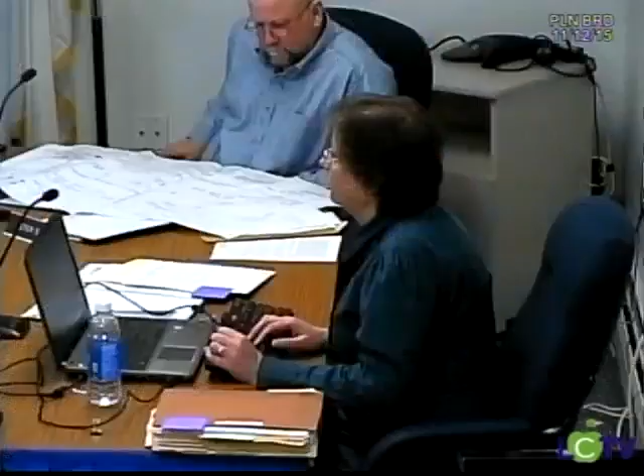I think the notes reflect that. Are we signing these? Just this and several copies of that. What does that do for frontage? It goes from 294 feet to 350-something feet, which then turns around and gives Mark T. and Cheryl C. Hollinger enough frontage to make another lot out of that. Is that what it does?

That's a possibility, but I think if you look at the location of the house, it's not gonna be able to be done because that house is pretty much centered. They just want the additional land. I suspect it might be for septic expansion in the future. They've got 3.5 acres as it is now. Why do they need another almost an acre, two-thirds of an acre?

Well, who cares? Does it meet the standards of an ANR? Yeah, so we're done. Not allowed to ask questions? Well, I mean, sure, if it's germane to the standard of an ANR, but who cares why they want to add land to their land?

Gentlemen, is there anything on this document you see that anyone needs to comment on? If not, hearing none... The only problem is it has the wrong abutters around it. Does it matter? The abutters are wrong. Does it matter? It doesn't matter for the purpose of the plan.

Okay, and it's now formally on that. The only thing that matters is their names being right. They check those to the deeds currently. I'm an abutter, but I'm not on it. Well, Mark, you're not memorialized on this one. I guess not. Does it matter to me? It's fine with me. Does it break your heart? Nope, it's fine with me.

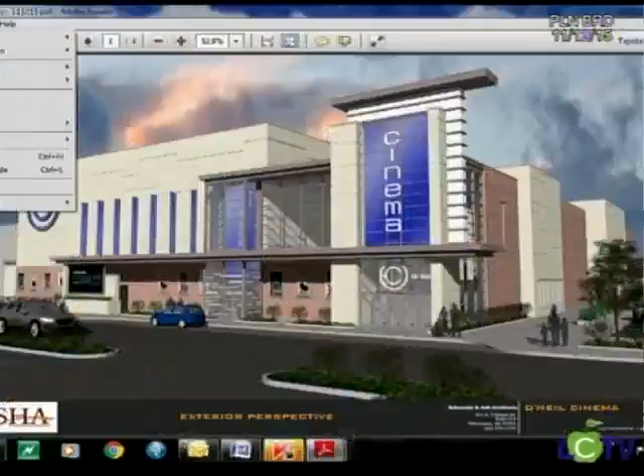As Sam said, last time we talked about the site plan and approved the modification, and here we're just revisiting to show the final elevations. I think David's team did a great job taking into account comments from the board, bringing things to a more pedestrian scale and incorporating site features we already have in the architecture on site. So with the image up on the board, I may let David take over. Gotta get our technical details going here.

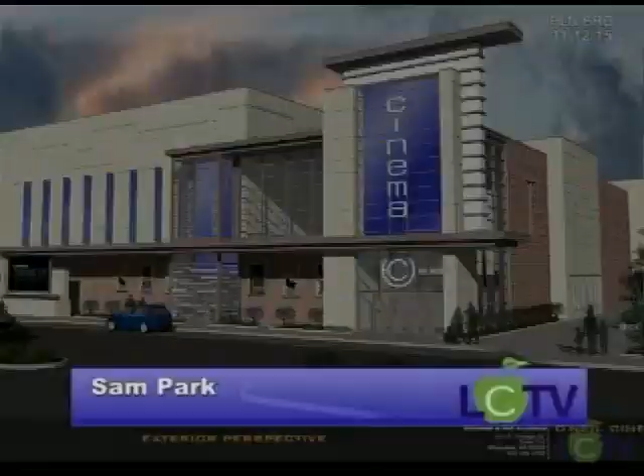So you can see on the cinema image, there's a lot more - he's added a canopy there, and a lot more lower planting along the edge of the cinema. Let's go with this. And there we go. So, David Baum with Schrader and Holt Architects.

Welcome back. Thank you. Three weeks ago you gave us great feedback. We took that back, went back to the original renderings that were presented to the town, and brought some of this identity into our building, tweaking it based on the comments you had.

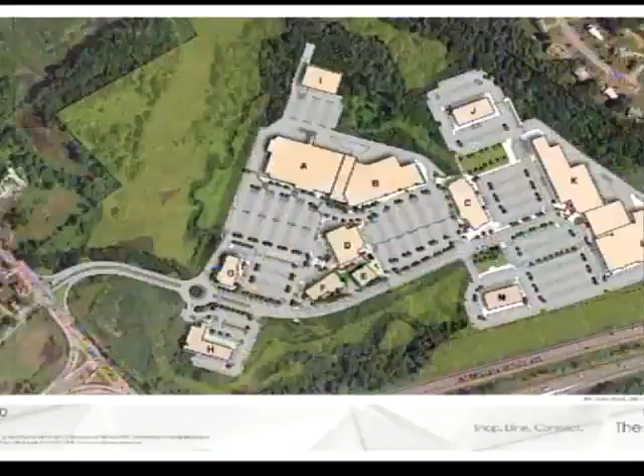So the first thing we talked about last time was pedestrian access from the restaurant - Tavern in the Square, Building C on the plan. You wanted a pedestrian walkway up the main boulevard, with nice planting along there. Our development team has pulled all that together for you. You go across that drive lane to Building K, and then we are Building L.

And what you asked for is a more pedestrian-friendly building with more Littleton character to it. So if you could go to the other image, the rendering - yes, that one there. What you see here is a revision we've made based on your comments. If you recall last time, that entrance piece was turned at a 45-degree angle because our client wanted it to face the interstate.

You guys wanted to face the center more and be the end terminus of that walkway. So we've made that transition, turned the building, squared it towards the parking lot so that you have a better view from Constitution Boulevard, okay?

The other issue is we wanted that more pedestrian friendly, more Littleton feel to it. So as you can see in some of the existing original buildings, there are these long canopies that came across the storefronts of various buildings throughout the center. So we brought those canopies into ours and stretched that canopy across the whole building, from 3/4 across the Grand DX screen all the way out past our entrance, to bring the scale of our building down.

We've got a lot of ins and out articulation across that building, starting from the left with a sign panel, which would be our reader board that would promote what movies are playing at what time. So as you drive through the center, you can see that this movie is playing at this time tonight.

And you can go to the restaurant, park down there, take your walk up, and be sure you're back here at that time. The next element in is another storefront that we have, and that's for our little lounge area that we have inside. So you can come in, sit in there, wait for your kids to have the movie, and then you don't have to go to the movie if you don't want. You can sit in the lounge and watch the sports games that are going on the big screen TV.

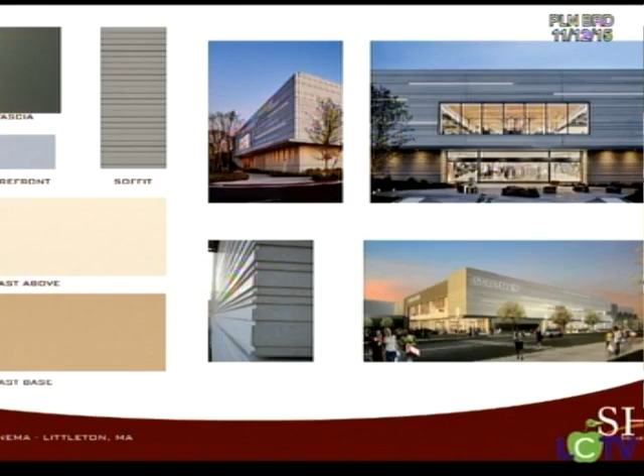Very nice, it does help with the massing, bringing it down. Subtle glow. Will you have the same down lighting that they're showing in the awning, or less? We're not gonna have that scallop effect, but yes, we will have downlighting. You'll have it over the posters probably? Well, you don't wanna light the posters because the posters are illuminated and they glow, so I can't put light on them. But we do have light in the ceiling that'll light up the sidewalk, but not the wall of the building. So the posters will glow, thank you for doing that.

And are those the materials, the precast? Yes, so it'll all be precast as opposed to metal panel, correct. Very nice. Those lights, just a final question for me, can they be adjusted if they're too bright, can you tone them down? Yeah, we can put them on a dimmer system. You can do that? Yeah, it's an LED light, so you can just dim them up and dim them down.

We're really focused on the lighting, especially in the evenings, so when you look at this, this is the ones we powered up for the second set of buildings. Isn't that nice? It just creates... the light actually takes away the blandness at night and kind of breaks it up a little bit. So it's sort of a scale issue. Yeah, I think it's a good idea, like, I mean, you see these buildings lit.

We aren't going to do the WBUR sign on the Mass Pike, you know. But when you get all the little features lit up, the one I like the best is when you look at the way they juxtapose, looking down the alleyway. Is that from the Starbucks? This is actually, believe it or not, the pet source, looking down at the Anchor. Really nice, I'll have to go up there. It actually lit up nice today, and we'll be running through the rest of it shortly.

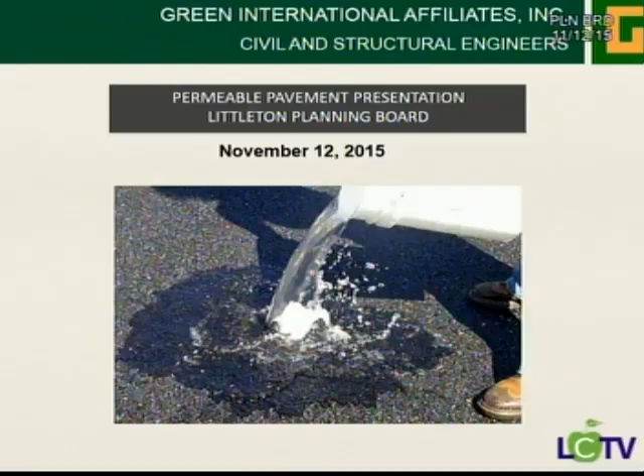All right, good evening, thank you, Dan. I want to first clarify that I'm not here as a sales pitch for permeable pavement. We were asked to come in and give our expertise as we've used these systems and seen how they've been designed, constructed, and maintained, and some of the benefits and problems with them. Please feel free, as I'm going through this, to ask any questions. You don't need to wait until the end, and if I'm getting too technical, just let me know.

So I want to talk first about what is permeable, also called porous pavement—you'll hear me use those interchangeably. What type of permeable pavement systems are there? There's actually more than one. Where is it appropriate to use, and where is it not appropriate? What are some of the regulatory requirements when using these? I'll give you an example where Green designed a system that's been installed for several years. What are the maintenance requirements? And then I'll sum it up with a summary of some of the benefits and cons, and open it up to questions.

So this is a typical example of what a permeable pavement system is. Before I get into this, any new project coming for permit approval, whether new development or redevelopment, if they're increasing impervious area, they need to deal with stormwater and mitigate it. Permeable pavement came about because when developing an area, a lot of land could be used up for stormwater BMPs like detention basins. So when you have valuable land area you don't necessarily want to use for that, permeable pavement provides a hardscape access for both vehicular and pedestrian uses, while also being designed as a stormwater best management practice that treats stormwater runoff.

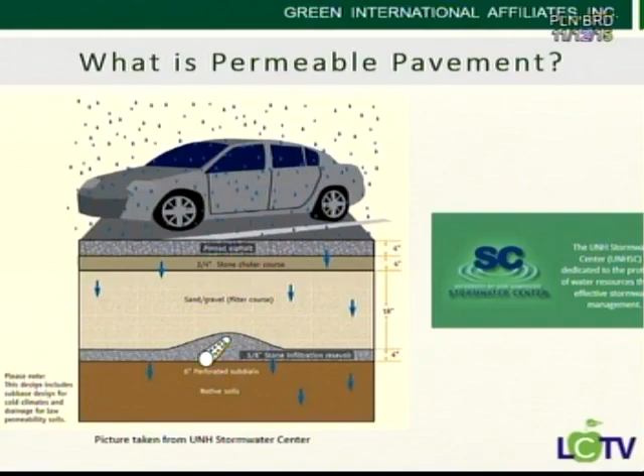The way porous asphalt basically works is it's an aggregate and asphalt mix that basically takes the fine sands out of the mix. So it creates these void systems, so that the water can just drain vertically through the system and infiltrate back into the ground. That's really the intent of these systems.

The third one is permeable pavers, and we see the pavers themselves are not permeable, but it's the void space between them that allows the water to infiltrate. If you see the acronym PICP, that stands for permeable interlocking concrete pavers, same thing. The fourth one is an open graded grid system, where the grid can be made out of either plastic or concrete, and you can fill it with gravel or turf systems.

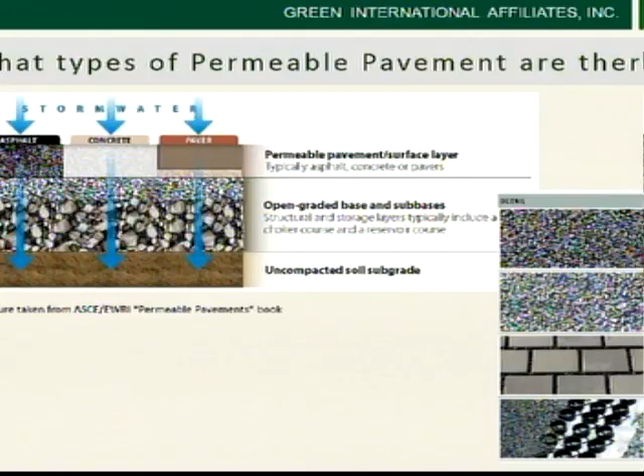So these are the standard permeable pavement systems that can be used for design. One of the most important things when looking at where these systems can be used is looking at your site conditions. These are not systems that can be used everywhere. They absolutely have places where they're inappropriate to be used.

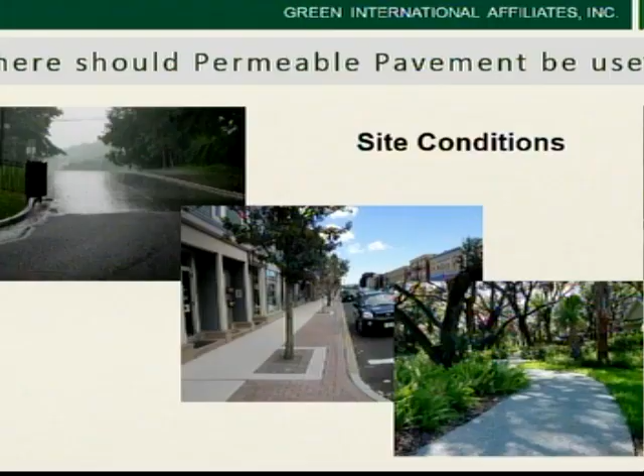Some of the main things that need to be looked at are: what are your soils beneath here? Where is groundwater? And what are your site constraints?

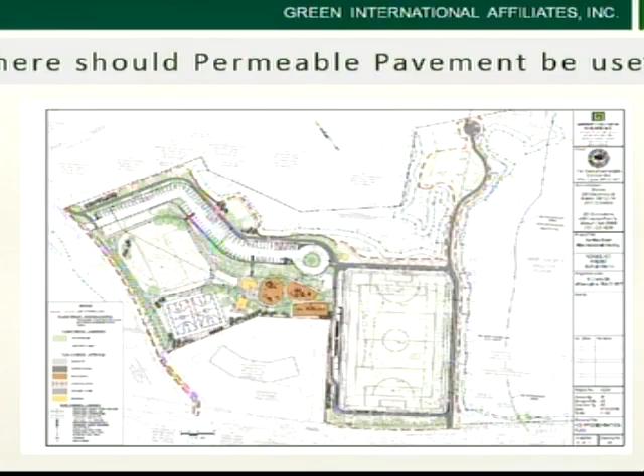This is an example of a project we're working on in Wilmington where we had some site constraints where the town wanted a perimeter sidewalk going around the entire area. You can see that dark gray is this sidewalk, and it also goes all the way up to the north. Where that portion goes up to the north, we had some resource areas on the side, so we really couldn't install a traditional sidewalk there and have either it sheet flow into a swale and capture and collect it, or do curb and gutter because of the grading and everything. So this was a way we were able to give the town a hardscape sidewalk, but also meet the stormwater requirements because this is a new development system.

So when we're looking at some of the site constraints and conditions and whether it's appropriate, some of the things that want to be looked at is: is there ledge on site? These things are meant to infiltrate water into the ground. If there's ledge there, that's not going to allow it to infiltrate into the ground. So it's definitely not advised where you may have ledge.

What is the distance for the seasonal high groundwater? There should be at least a minimum of 2-foot separation between seasonal high groundwater and the bottom of these systems. Not the top, but the bottom of these systems.

Is there a Zone 1 interim wellhead protection area or Zone A surface water protection area? If there is, they should not be located within them. They should be outside of that.

If it's within that, it needs to be lined and not infiltrating. Does the area have a big grade change in topography? Typically, when we look at designing these things, we want about 5% or less grade for when designing them. And then, is this system going to be placed next to a building?

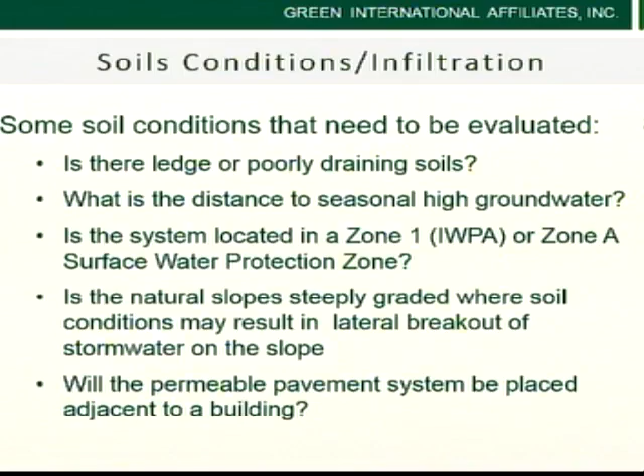It's not to say that it can't be placed next to a building, but if it's less than 10 feet from a building, there should be appropriate controls designed so that the building is waterproofed. Maybe the system is lined with an impermeable liner right next to the building. We want to make sure that when they're being designed, the water that infiltrates does not get into a basement or cause flooding.

When someone's looking at different sites, there are multiple ways to design these permeable pavement systems. The first is more of a full infiltration system, shown on the top left, where you have no underdrain system—the water infiltrates vertically straight through it, and that's it. That system would probably only be recommended for A-type soils, where you have really well-draining soils.

Typically we use more of the second and third type of section when designing it. Mainly, it works as a partial infiltration system in that it goes vertically through the system, but you have an underdrain system there. That underdrain could be designed for a couple different reasons—one being if you have poorly draining soils, it allows some of the smaller rainstorms to infiltrate, but any larger storms get collected and moved out, with some other stormwater treatment mechanism to handle them.

Or the third type is designed as kind of an overflow system, so you're allowing it to infiltrate even more, but it has to fill up first, giving it a redundancy system so that in a stormwater event you didn't anticipate, it gets into the system and out again without causing any harm within the pavement system.

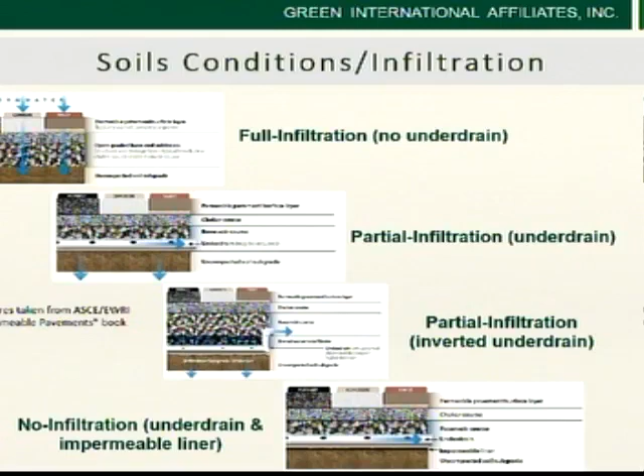So how would an engineer go about showing that treatment in this system would be equivalent to a traditional system? They would need to submit a stormwater management report showing how they're meeting the water quality standards and the peak rate—the drainage layer, that bottom layer, is basically acting as your basin, so to speak.

And the only credit that you can use is basically the void space of that, so you can only use about 30% void space to take credit for the amount of volume that you actually have in these systems. So they need to show, typically, how they're meeting the 2, 10, 25, 100 year storm, whatever that is.

They need to show that they're meeting their peak rates using this type of system based on their native soils below. Are they using an under drain? They'll have to put that in their design and show that in all the calculations. Then they'll have to show how they're meeting the recharge calculations and water quality.

This system can, if it's designed properly, with the proper soils and proper separation of groundwater, meet all those requirements. But there are several steps that need to be evaluated first to even determine if it's appropriate to use this.

And going back to the glacial till question, that ties into what she said, that sometimes those soils, such as glacial till or clay, may not be appropriate to use this type of system unless you design the proper overflow systems to account for the fact that you're not going to get that infiltration. You still get treatment through the media, but not the infiltration you'd get with sand.

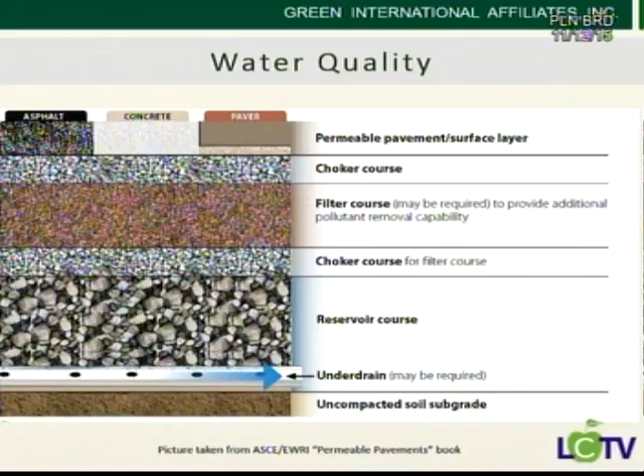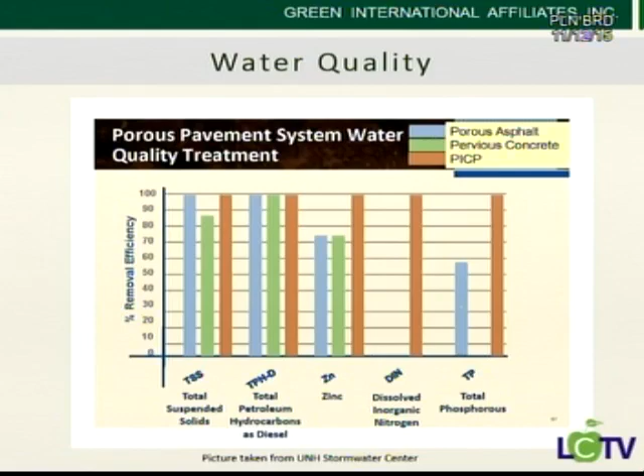Pervious concrete wasn't analyzed. It's showing between 50 to 60% phosphorus removal for the porous asphalt, and the permeable pavers have almost 100%. The other thing this is showing is total petroleum hydrocarbons, which you get from oil drips - all 3 of these systems treat about 100% of that. The reason for that is the sand filter. If you don't have that, you're not going to get those results, but that sand filter acts as a great treatment for those type of systems.

One of the other important things when looking at these systems is the regulatory requirements. Anywhere within the jurisdiction of the Wetlands Protection Act, you're triggered to the Mass DEP stormwater standards. My understanding is the Littleton bylaw, if you're coming for site plan approval, also triggers compliance with the Mass stormwater standards and subdivision regs. Bottom line: there are specific requirements - they should be located outside of Zone 1, the interim wellhead protection area, and outside of Zone A, the surface water protection area. They need 2 feet of separation to groundwater, and there are other setbacks and slope considerations that need to be looked at. So there are important regulatory requirements that need to be addressed.

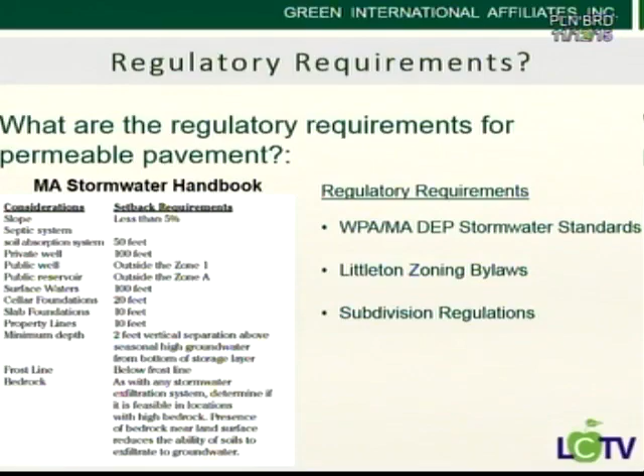They should not be used in areas with high traffic or high average daily trips. If you have a site like a big retail site with a lot of average daily trips, this would not be recommended. It's also not recommended for land uses with higher potential pollutant loads - you want to be careful of that. It doesn't mean it necessarily can't be used there, but if used in those areas, they need to be lined. They cannot be infiltrating systems - they need to be lined and would need some other supplemental BMP.

When I just finished the Bancroft School in Andover, they had a fire road made out of permeable asphalt paving, used in place of a stormwater retention pond. So the kids ended up with a playground instead of a retention pond, and the 2 feet of special material underneath the fire road became the retention pond. It's a fire road so nobody's really on it - but they still vacuum it, sand still gets in it, and they have to vacuum it out.

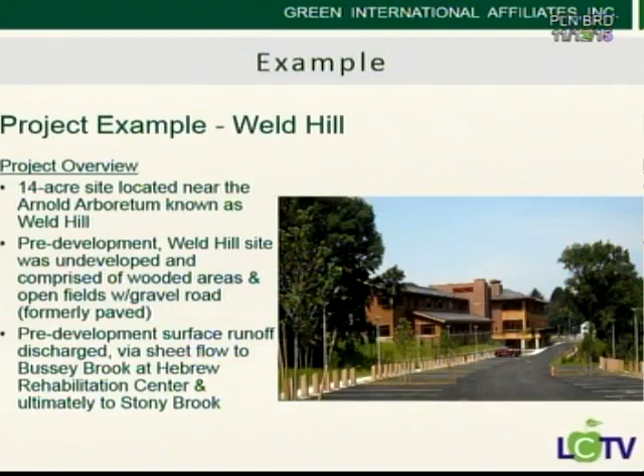This is an example of a system that Green designed at Weld Hill, owned by Harvard next to the Arnold Arboretum. It was a driveway with about 50 parking spaces designed as porous pavement, installed in 2009, and it's been working remarkably well. The cross-section for what was installed is shown right there, and this site actually did have poorly drained soils.

So to overcompensate, they increased the drainage layer significantly. It wasn't just meeting the normal standards, they also put in redundancy measures. At the bottom of the driveway, they put in catch basins to overflow to a subsurface chamber system, because it was important there due to the poorly draining soils.

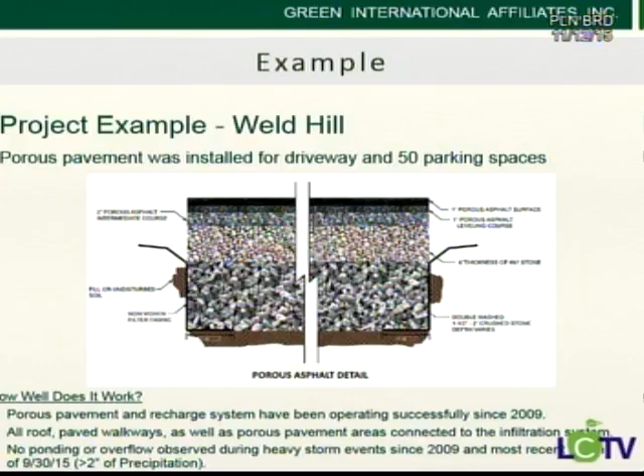But that's been in there since 2009. It's been through some major storms, and they haven't had any issues with ponding or frost heaving or anything coming up with that.

For a development like that, typically if you're bonding a development, you want to make sure our highway department doesn't get stuck having to come in 15 years later to mitigate some type of failure. Especially with that much complexity to a subgrade system, is there any recommendation for how, if we wanted to implement something like that on a road we'd take on as a municipality, would we want to be proactive about what type of funds need to be put out for mitigation?

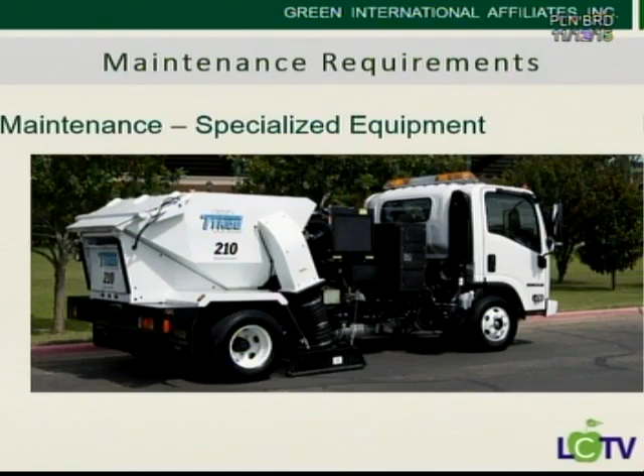There's definitely maintenance required, and specialized equipment that needs to be used. There's a regenerative air vacuum sweeper, which is less expensive and used more often, or you can go to fully straight vacuum sweepers that are more costly but can actually rejuvenate the porous pavement if it gets to the point of failure mode. So there are mechanisms that can be done if the system gets clogged.

Obviously the intent is to make sure it doesn't. One of the biggest things the town would want to ensure, if projects come forward recommending these systems, is that they include an operation and maintenance plan showing what equipment they're speccing, and how often they'll be doing sweeping and inspections. Because unfortunately, an owner gets excited, puts it in, doesn't maintain it, and five years later asks what to do — by that point it could be in failure mode. So it's really important that any project include an operation and maintenance plan, because if they're not going to maintain them, they'll fail early and fail often.

For a roadway that the town would eventually need to accept, you'd want to think very hard on that, because the maintenance requirement burden gets placed onto the town. Also with roadways, you need to look at the whole length of the road and the soils beneath it. It's also not appropriate for high-speed roads — you really want it for lower-speed roads. High-speed roads will wear it more quickly, so you'll be maintaining it much sooner than normal asphalt. So there are certain areas where you wouldn't want to use it for roadways.

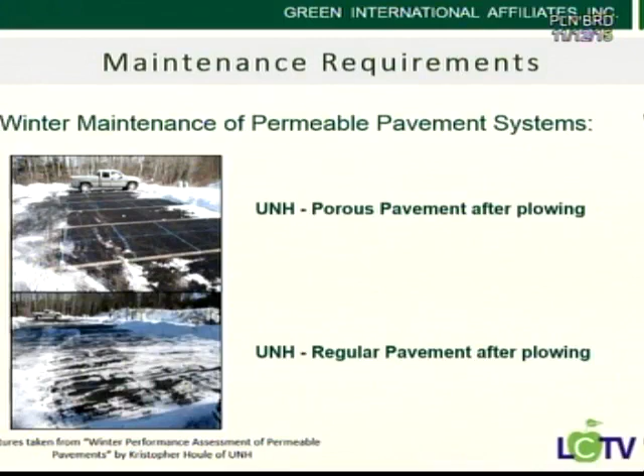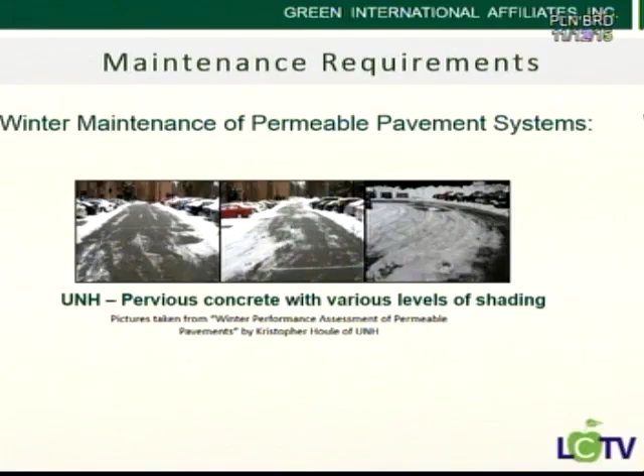I was at a seminar at UNH for permeable paving, and they took us out to an asphalt parking lot. They dumped a 5-gallon bucket of water on the pavement in the middle of winter, way below freezing, and it went right through. Yeah, 5 gallons just disappeared.

The great thing about it is because you have such a thick cross-section of this system, you don't get freeze-thaw. The whole purpose of regular asphalt is to keep water away from the drainage system underneath it, because if water gets under it, it freezes and causes frost heaves. With this system, because of the thick cross-section, the water gets down and never freezes up enough to affect the system. So you don't actually have freeze-thaw effects with that.

So this is just a quick summary of some of the benefits and cons. This can be used as a stormwater best management practice to treat runoff volume and peak discharge rates. It can be used to infiltrate and meet recharge requirements as well as water quality goals, as long as it's designed appropriately and site-specific. Another benefit is it can reduce stormwater temperature and the heat island effect.

A lot of times in the summer, with a regular asphalt system, the water that hits it and runs off along the pavement heats up pretty quickly. If it ends up going to a catch basin and then directly out to wetlands, you can have ecological issues with that. Whereas with this system, because it's going straight from the air into the ground, you're not getting that change in temperature, and you're keeping it localized and going straight in.

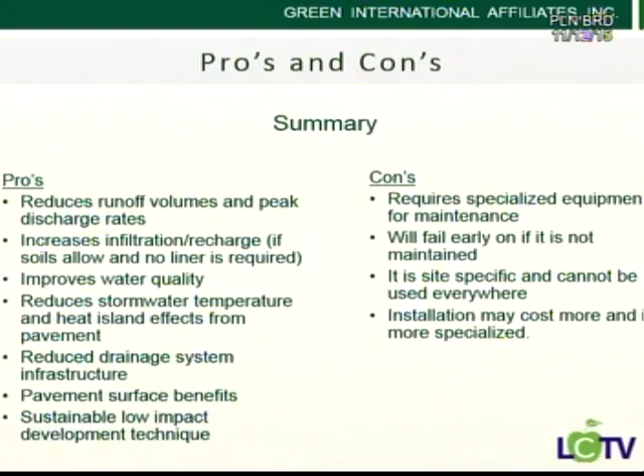Some of the cons are that it requires specialized equipment for maintenance. It will fail early if it's not maintained. It's site-specific, it cannot be used everywhere. And the installation may cost more in the beginning. It's more specialized, so you need a contractor who knows how to install it.

Wow, that's it. Great, good job. Any questions? No, that's great.

Yeah, one point they made at the UNH conference was that you want to capture rainwater as soon as it falls, because that's when it's cleanest. If you can capture it and get it into the ground soon, you address the total suspended solids, which is where all the contaminants are. So we have the rainwater captured, it brings it down, and that's where we need to treat it. So when it hits the system, it goes right in, and that's that.

Great, good. If the board has any other questions, feel free to contact Danielle and myself, and we can get you answers. Oh, you did a wonderful job. Well, thank you both. Okay, thank you. Thank you, Eric.

Okay. That's good. Oh yeah. So that's the seminar for this week. That was a good one. Let's see, it's 9 o'clock now, running a little late.

Turkey Tree Farm, 260 Foster Street, Grimes Lane, a 36 lot open space subdivision. The engineer has indicated they have significant new information to present at this meeting, and anticipate continuing the discussion at the December 10th meeting, given they had not yet authorized the peer review. But I think that actually happened - I did get the check for the peer review. Depending on how much new information comes in, Luke's going to take a look and see if he can do that within the original scope, or revise the estimate if needed. That's fabulous.

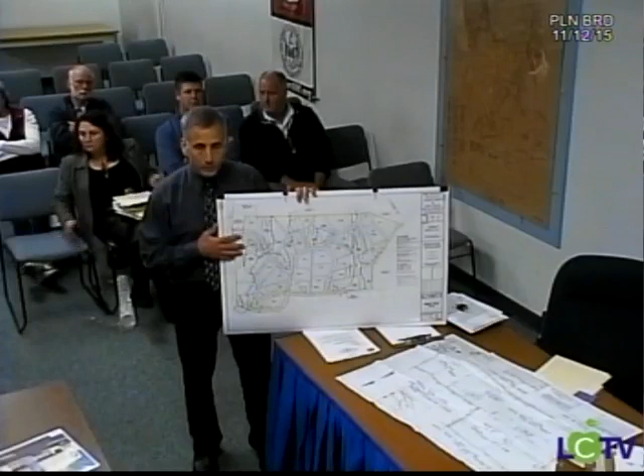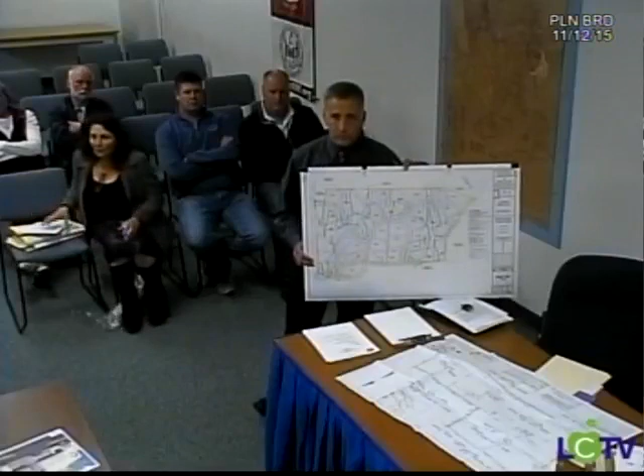We have reduced the subdivision from 36 lots to 31 lots. We listened to you and some of the concerns about the attractiveness of the open space along Route 2. That, coupled with discussions the applicant is having with the Board of Selectmen on the K piece - they have the K piece under agreement, and the selectmen are considering right of first refusal on that.

So there's been some discussions, and within those there was a great desire to preserve the western flank of the K piece, which provides a connection to the town forest. So within that discussion, our open space is now focused more to the west. What we've done is removed a portion of the southern Grimes lots from the mix, reducing us down to a 31 lot yield. This is the configuration of that 31 lot yield.

Within this, the board had concerns about nine of the lots as far as their buildability, constructability, whether or not they were truly lots. So the lots I've highlighted in green here, the 9 lots, are the ones we call marginal. What we've done within the package the board will receive is actually done soil testing and septic designs on each of those lots.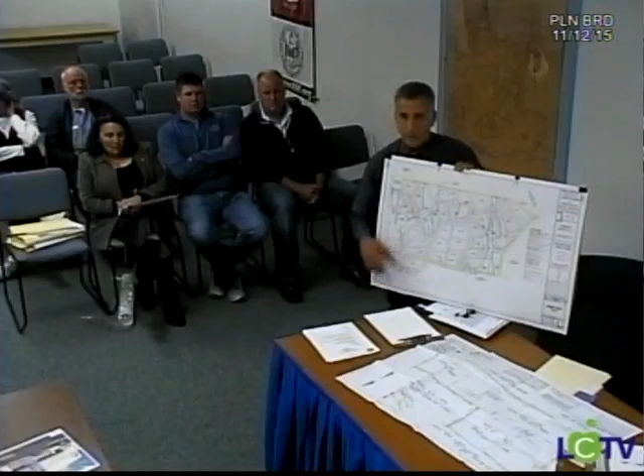Each of the 9 marginal lots - so you could see that in the worst case scenario, where the lots are tightest to the wetlands, we're showing that we can actually get a house and a fully designed septic system on those. We've done testing on those lots, and that's all reported for your peer reviewers to take a look at and verify. Our thinking is if the 9 most marginal lots are buildable, then we can prove out the yield.

So then we looked at the OSRD, and again, K's up here.

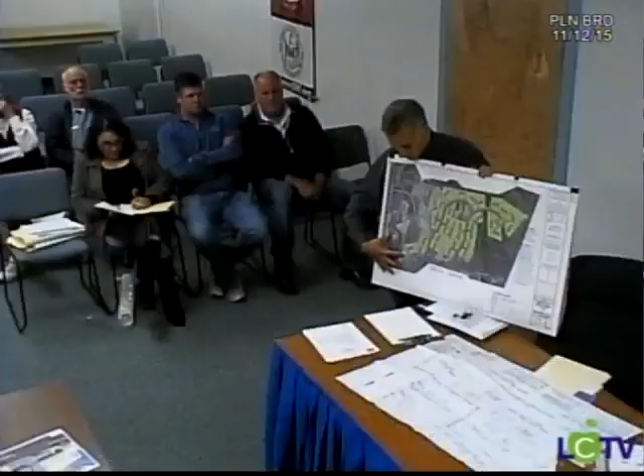Desire of the selectmen to preserve the western flank, provide that corridor between the train station and the town forest. So we're thinking of really concentrating our open space here. We've got a large piece in the island that's all dry, a very large piece of the active tree farm that's dry, and some dry land up in here.

I think we're up at 20... 21.4 acres of open space with 30 lots clustered here.

We've also rearranged this to have complete corridor spines in 3 locations: a northwest direction, a north-south direction, and then a spine going east-west for that critter crossing as the board wanted. So we provide a real nice buffer to the forest as far as the impacts there, keeping the development off Grimes, pushed up into the site.

We think we've got a plan that starts to address the concerns and comments of the board, and we think it's definitely ripe for the peer reviewer to get into it and get their thoughts back to the board, allowing you time to digest what we've just given you and move on from there. So you can grant whatever extensions to the 45 days that are needed for the board to move through this, and hopefully get to a point where the board's comfortable, and we'll move on to the next steps, the special permits and definitive subdivisions.

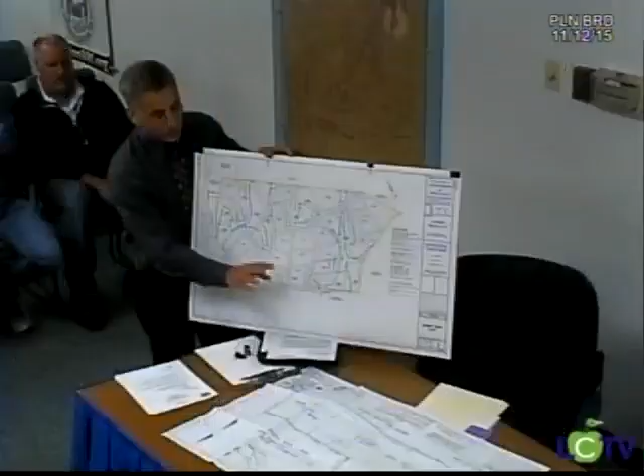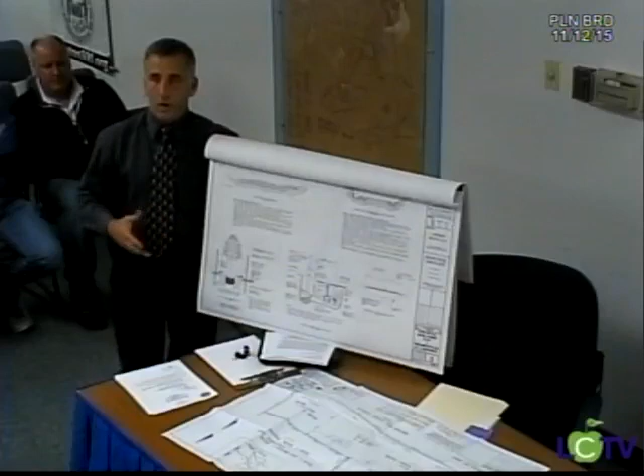We also talked a little last time about the notion of country drainage, and we've given you a full list within the letter of the waivers we would be seeking. But we've also given you details of that roadway system and how that would work, cross-sections, and also how we would work with Grimes and the existing walls, making necessary improvements down there while trying to keep that rural character and keep those walls intact.

I'm not sure if it's worth it to run through all of these points, or if the board just wants to get this out to peer review and digest the information at your leisure. We have kind of thrown a lot at you.

Could you, since this is the first time we're seeing this, give us a Reader's Digest version of what we're looking at, what we'll be looking at?

Certainly. Basically, the first part is just talking about the changes to the yield plan and the OSRD, and the refocus there of the open space, going along with the discussions with the K piece. We talk about the soil testing on the 9 lots and the more in-depth look at that.

We have the issues of ownership and some of the legal issues that Attorney Gould can speak to, and then we have the list of waivers that we would be looking for on the country drainage.

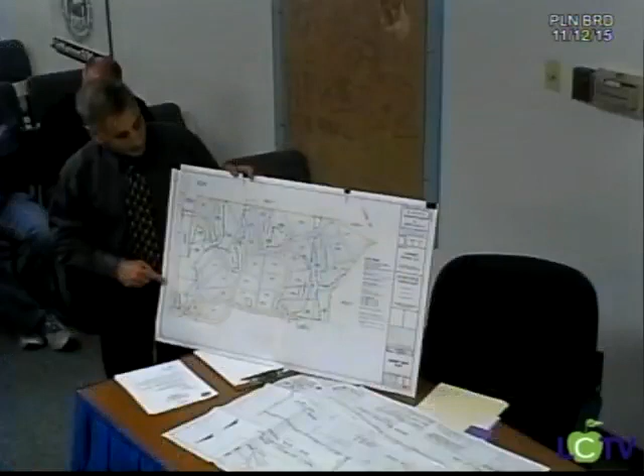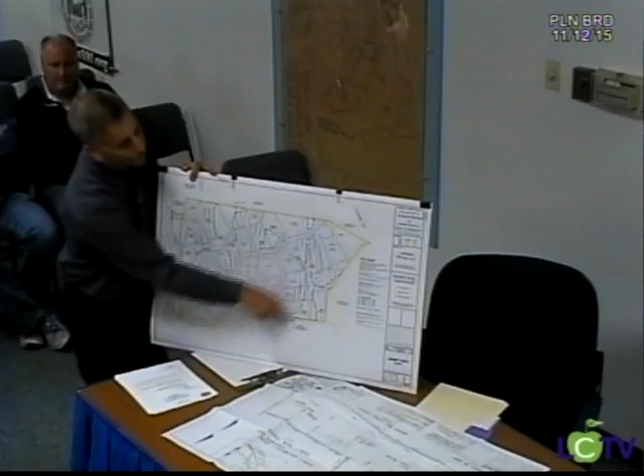The commission has voted to issue the ORAD on the wetlands line, so the wetlands line is now official, if you will. They brought up the question of a vernal pool in the farmer's pond, a vernal pool up here at wetland C, and a vernal pool down here at wetland G. We've gone out there and done an investigation of those areas, and from our standpoint, the farmer's pond does not meet vernal pool criteria because it has water in it year-round. The definition of a vernal pool is that it dries up, goes seasonal, so the critters leave it, go do their thing, and come back to it in the spring.

So we feel the farmer's pond is not a vernal pool. This is our wetland scientist that's doing this investigation. Wetland C, this one up in here,

that wetland doesn't have the ability to hold water, so it doesn't pond enough in the springtime to do that. And the same thing with this one. This one's got an outlet that runs down, connects between this wetland and this wetland.

So we don't feel they have the initial or the baseline characteristics of vernal pools. The other test is not so much does it have the characteristics, but are there critters using it? We can't look at that until springtime when they're actually in it. So we have asked the Conservation Commission to defer that until we get to the notice of intent stage, in which case we would do that additional study and report back to them, and then provide the protection that we need to.

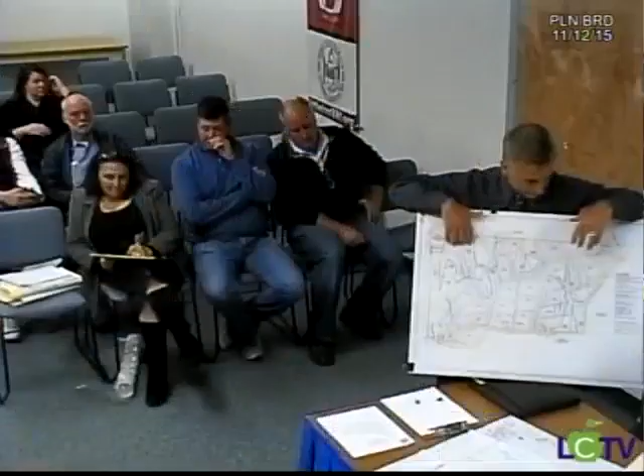Mr. Chairman, Mr. Montneri had a question with regard to the shape factors. We did the shape factors on the yield plan for the two reduced frontage lots. All the rest are fairly uniform, but we can certainly add all the shape factors to all the lots, just to clarify that they all meet or exceed that requirement. Happy to do that.

That work for you, Mark? Yeah, it's supposed to have that, so no problem. Good.

This down here is envisioned to feel more like a driveway. Okay, so that'll be a driveway, not a road, to keep the farm feel there, and this would be the primary. So there'll be some type of demarcation to give it more of a driveway feel, because in our paper drawings it looks like another road.

Now, it's hard to tell, but do we have sidewalks traversing the whole project? Yes, they're requesting a waiver to not make them concrete. You want to make them bituminous? I mean, our thought is to have a country drainage, country feel, rural setting, and we think that's more in keeping as far as that's concerned. Jimmy, what are your thoughts on that concession?